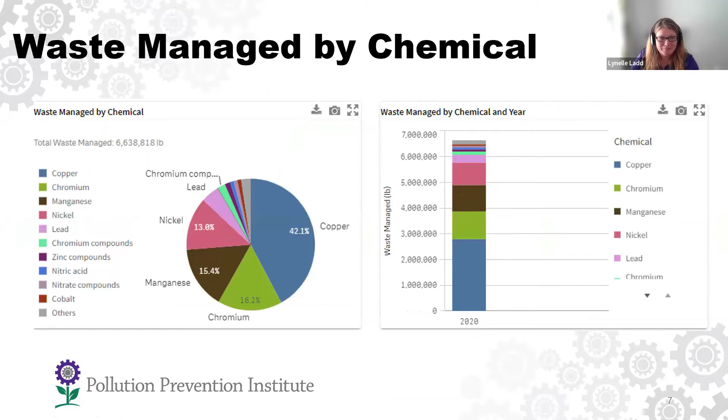I spent a lot of time. This was just in case I could not pull up and show you the internet. I just wanted to make sure I had those locked in.

Now let's talk about energy opportunities. And a lot of people say, well, this is low hanging fruit. Just about everyone knows about opportunities to reduce their energy usage, or change their process to reduce energy use. But one of the big ones that we help companies identify, and it's really pretty simple, is compressed air leaks.

And so I just wanted to start out with that topic and give you an idea of what it costs to operate your compressed air unit every year. So this is from FS Elliott, and they have a how to calculate your compressed air energy costs. And they gave this example, and it's really, I think, an excellent example to use.

So when your unit is fully loaded, if you had a 200 horsepower compressor rated at 215, and this would be brake power, I believe, that operates for 8,000 hours annually. So this number I want you to think about a little bit. A lot of people say, well, we only run one shift. Are you shutting off the compressor? That's something to think about.

If you're not shutting off the compressor every day at the end of the shift, there's a possibility that it is actually running this many hours. And then what we're going to talk about next, this becomes maybe a really huge draw on your electric bill. So let's think about this for a minute. There's a nameplate service factor that you probably should be able to find on your compressor. And then just assuming that it's loaded 85% of the time with a 95% motor efficiency, and the rest of the time it's not fully loaded.

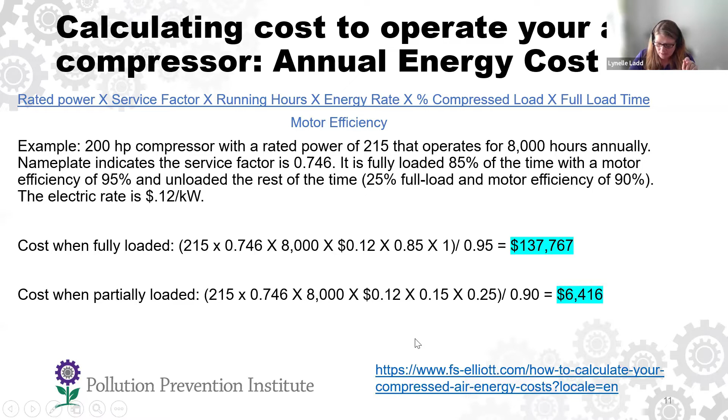So why is it important to understand this? Well, with compressed air, you're going to have energy loss. Your compressed air units operate on demand, and sometimes they're undersized. So they're just running, and they can't keep up with demand. Or due to poor maintenance, there's holes; either you're not maintaining the compressor efficiently, or you're not maintaining your hoses, connectors, lines, or even the air tools. They could be leaking all the time while they're sitting there and the compressor's running.

You may not have air storage, which could help save some air and reduce the use of the compressor. And sometimes we see employees in the workplace misusing air. So it's important to train employees on the appropriate use of compressed air.

In this example is a bleed or a blowdown. This company did not have a dryer on their compressors, so moisture would build up in the line, and they would open these blowdown parts of the system every so often to let the water out, because if you have water in your lines with the air and it gets to your tools, your tools are not going to function correctly.

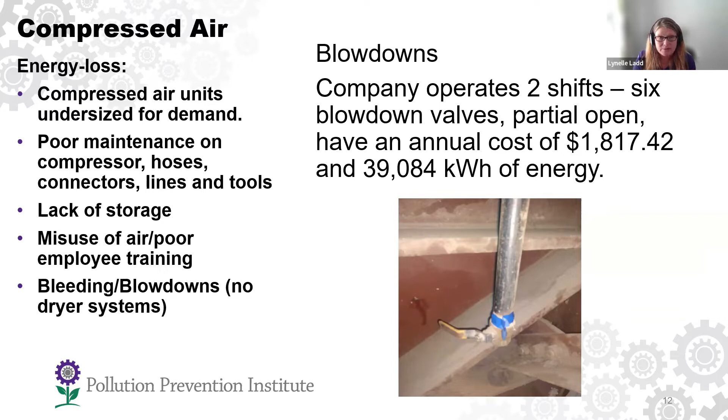But throughout the facility, we found other leaks that were occurring, and it all added up to some pretty big numbers. For instance, last year, our interns were at several industries that are considered metal fabricators. And this is not unusual. This is not a blight on the company. Whenever you're using compressed air and you have a rubber hose that's running against cut metal, you're going to get holes in your hose.

In just this one little snapshot, we found 33 leaks at one company, 30 at another, and the circuit rider looked at 6 different facilities and found leaks. This is one facility, this is another, and you can see that depending on how many leaks are identified and the size of the leaks, how much air is being lost, you can get some pretty substantial savings over a year's time if you would repair those leaks once they're identified.

And that's something that our interns can do. Our circuit rider intern can go into a smaller facility and do this type of work in one day and identify the leaks for you with a UE Systems ultrasonic leak detector, which is what we use. These are substantial findings, and it also helps save electricity for the company.

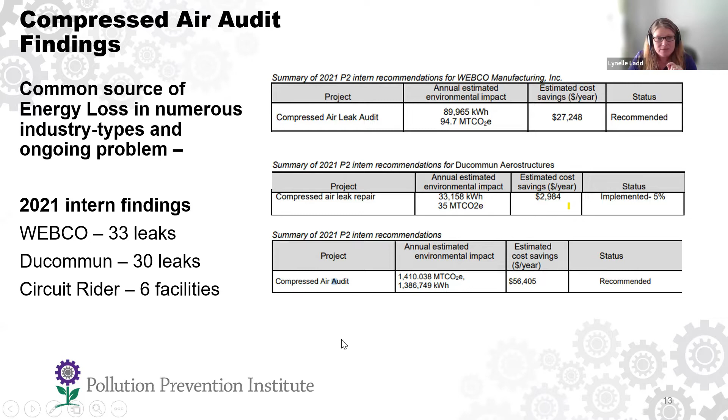Lighting is another area where we have a great opportunity to save. Again, it's low-hanging fruit. So, when we're talking about saving money and changing to LED, plug and play is the cheapest way to go. If you're going to have to change out your fixtures or ballasts and things like that, then we get into a little more capital cost, a little bit extension of the return on investment. But those are things that our students look at and can calculate for you.

Occupancy sensors, I'm just kidding here, not really, but they're not just for boardrooms and bathrooms anymore. We looked at a very large storage area where the lights are on 24/7 and people are not in there 24/7. So an occupancy sensor in that area was going to save 8,395 hours a year of those lights being on. And that was going to be 10,947 kilowatt hours of energy.

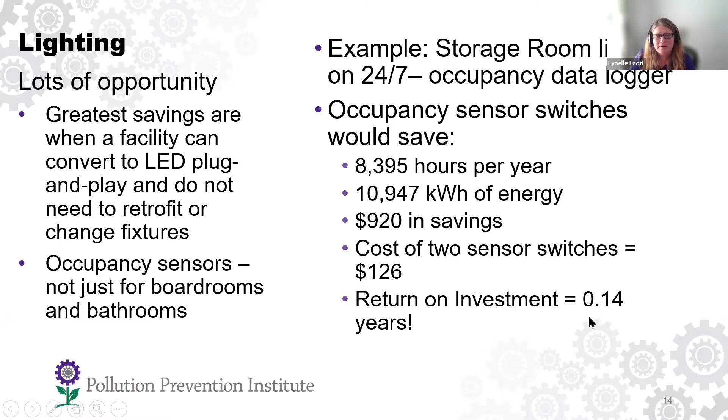It's small savings, but the return on investment, just to install these 2 sensors, was only going to cost $126. And so it's like 0.14 years return on investment, but at least the lights aren't on all the time if they don't need to be.

Fuel usage is another area that we like to help companies look into. The different fuel types you might be using in industry, right sizing your equipment, looking at your building envelope and your process areas. And when I say process areas, maybe you have an area that has to be climate controlled and another area that's not. And so that heat loss between those 2 areas can be very critical and may increase your fuel usage in the winter and your electric in the summer.

Shipping and receiving doors are notorious. They don't always close fully. People leave them open while they're moving materials in and out. And one of the things that's been brought to my attention recently is the winter storm that we had last year, where the temperatures were just frigid. Those surcharges are starting to show up on people's fuel bills.

So changing your fuel type, if you can get away from using a natural gas or a fuel oil and go with electric, that is going to make things more efficient at your facility. It's going to reduce your costs. And right sizing equipment is also important. We worked with CST Storage. They've been a great partner with us for many years with our intern program.

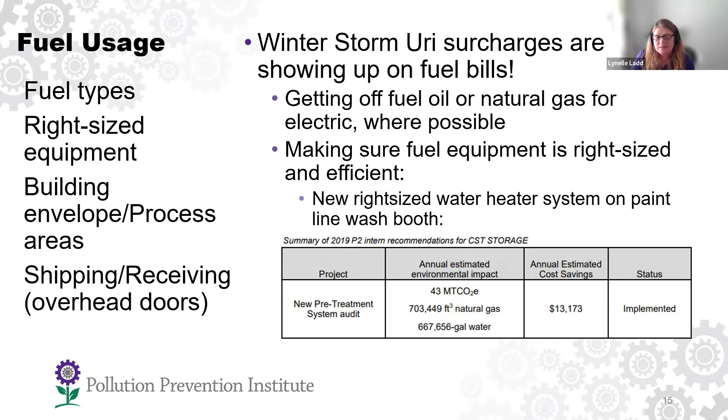So I just mentioned water savings. Let's look at that real quick. I wanted to make sure people were aware that there is some assistance and some guidance on EPA's website as well about water usage and metal finishing. So this is a guidance document that you can find. It's brand new. It was just issued this month of this year. I'll take you there real quick just so, if you want to look this up later, we have it linked on our webpage.

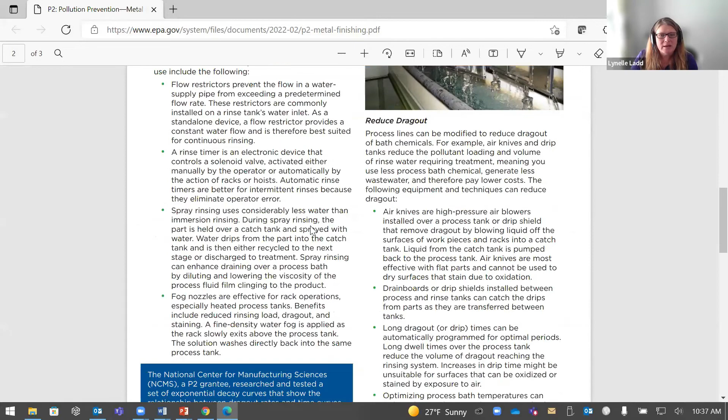But it is a really good overall guidance document about metal finishing shops and when you have to utilize these metal ion bearing solutions that contain chromium, zinc, nickel, and other metals. And Katie may touch on this, I'm not sure, but this is really great information and a document for you to review and read. I won't cover it here because I just don't have time to go through the whole entire document.

So wastewater is always something to focus on. And when you have a water treatment system, because the constituents of your wastewater contain chromium, let's say, you want to make sure you're operating that system optimally, how it was designed. Make sure you're doing preventative maintenance on that system, and also training your employees on how to operate

your water treatment system. So one of our interns last year was a circuit rider and looked at a company that had a water treatment system in, but it wasn't being operated properly. The employees had not been trained on how to operate this water treatment system, and it was from one of their plating tanks. They were looking at a recycle rate of 10%, and the effluent rate was 18 to 25 gallons per minute, depending on who was the operator that week or that day.

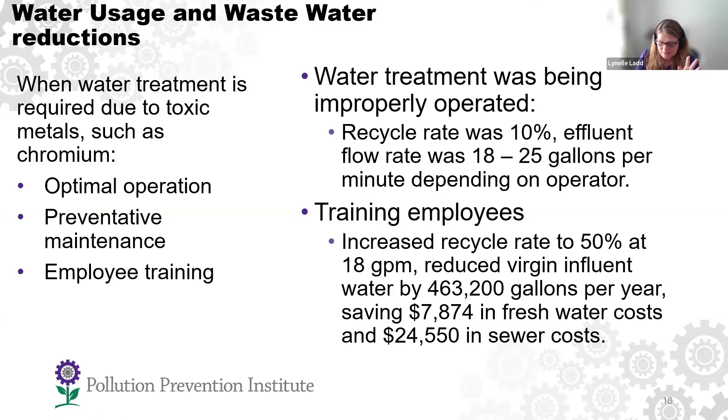I threw this in here because we saw a lot of industrial stormwater situations last summer with our interns. I wanted to make sure everyone's aware that with industrial stormwater permitting, it's called the pollution prevention plan that you have with an industrial stormwater permit, but it's not P2, it is regulatory. It's the minimum of things that you have to meet if you fall under this category. Most everyone in the major group 33 of the SIC code, which would be NAICS 331 and 332, needs to look at your stormwater discharge potential and evaluate if you need to obtain a permit and what you need to do there.

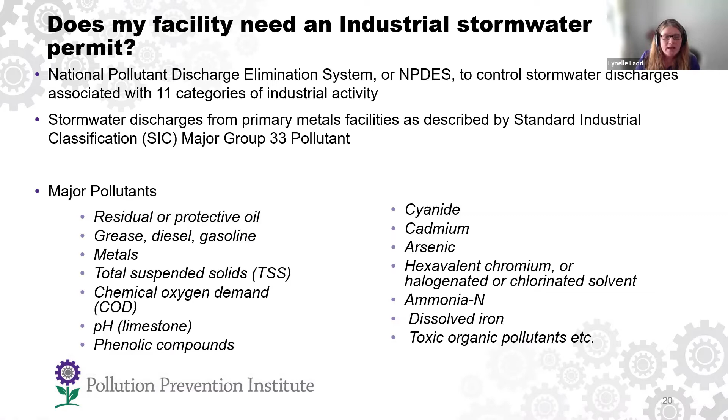So this is a list of the major pollutants that you would see in this group of NAICS in your operation, and why they would be of concern, and the type of activities where this could end up being a stormwater concern. So if you're storing material outside, if you have equipment like your trucks outside, and your fueling areas are outside and not contained. If you have waste storage, like hazardous waste storage outside, and it's not covered or contained. And if you have illicit discharges.

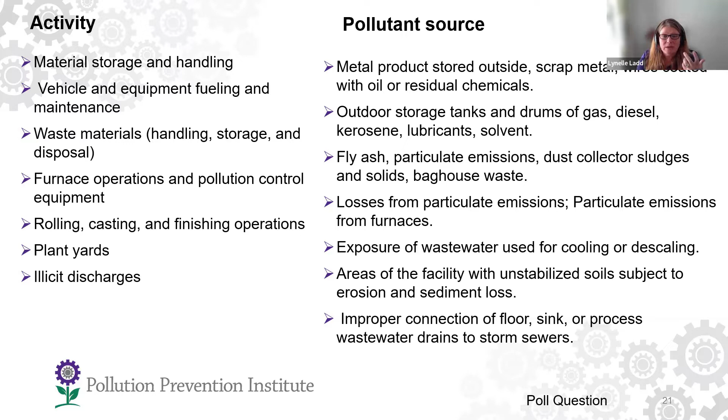Over here would be an example: when you're storing your products outside, it could be your scrap, it could be your final product. You might have drums that contain the fuel oils or the lubricants that you use. If you're storing your emissions, like from a bag house that's been captured, outside and it's not covered or contained, that could be a source of stormwater pollution. So I just wanted to bring this to everyone's attention, that this is a requirement that needs to be addressed in many situations.

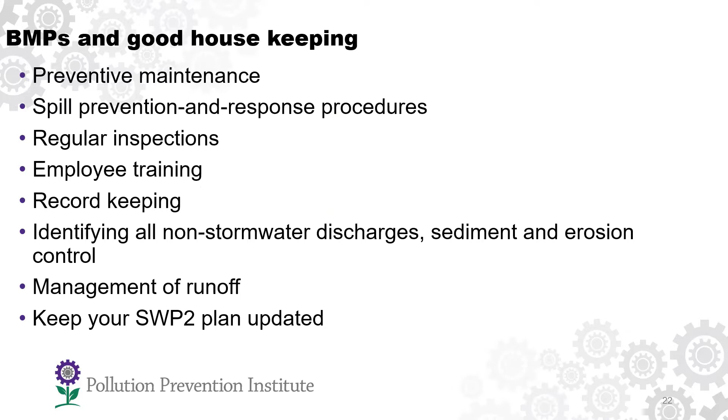Lynelle, you've got about 5 minutes left. Okay, I'm going to rush through this so you guys can see this. I won't stay on this very long because what I really want to get to is hazardous materials.

So when we're talking about hazardous materials, I wanted you to be aware that we have some really short, concise videos that deal with SDS and how to use your SDS to identify what's in the raw materials you're using at your facility. We have a video on chemical replacement strategies, chemical inventory management, and process change. I'm just going to show you where it is on our website real quick.

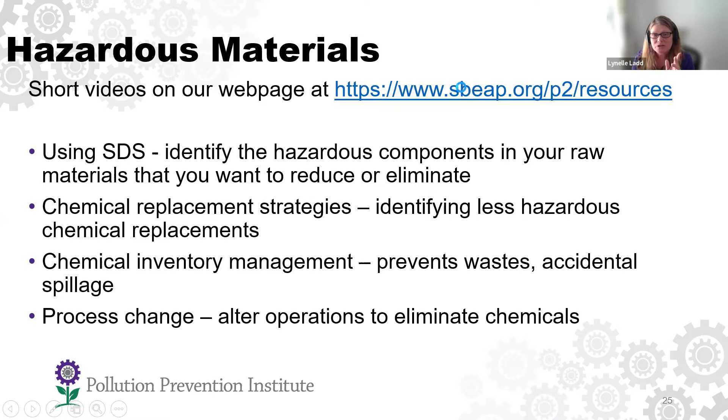We have a lot of P2 resources. This is the P2 tab that talks about our intern program and applications for businesses and students. We have technical assistance information, and all of our case studies from the intern work that's been done. Some intern case studies have presentation videos that you might be interested in watching, especially for an industry type you want to learn more about. We have a news page with some of the latest things going on, EPA information that might be of interest to you, and other resources.

And that's where our videos are. Hopefully you have access to YouTube, because if you click on these, it takes you to YouTube. Last year we had another best practices in the metal fabricating industries P2 workshop that we recorded, and you can watch here. We have some information about TCE, and then Region 7 has a pollution prevention roundtable, and all of our agendas and notes from our meetings are found here if you're interested in looking into that. But I wanted to make sure you were aware that we have a lot of resources, and we're trying to build those resources all the time.

So if you haven't heard, and I want to make sure that we cover this, EPA has added a new hazardous air pollutant to the hazardous air pollutant list. 1-bromopropane, or 1-BP, also known as n-propyl bromide, or nPB, has been added, and it went into effect February 4th. So it is a HAP, and right now there are no NESHAP or MACT standards that cover this. So they will be investigating whether or not to add this into already existing NESHAPs, or whether they will be creating a NESHAP to cover this. And this may be something that Katy will talk about here in a minute as well.

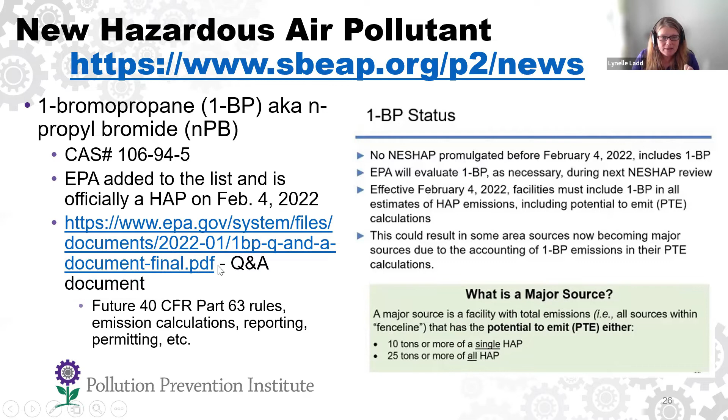Also, because it is a hazardous air pollutant, you now need to be tracking it and adding that into your total HAP emissions. So even though there are not any NESHAPs yet that would be applicable, you will be required to track it for your total HAPs. So whether you're an area source or a major source, you're going to have to put that into your total HAPs calculations for your air emissions. EPA has a question and answer document on their website. We can make this available to attendees at the end so that you have access to these links.

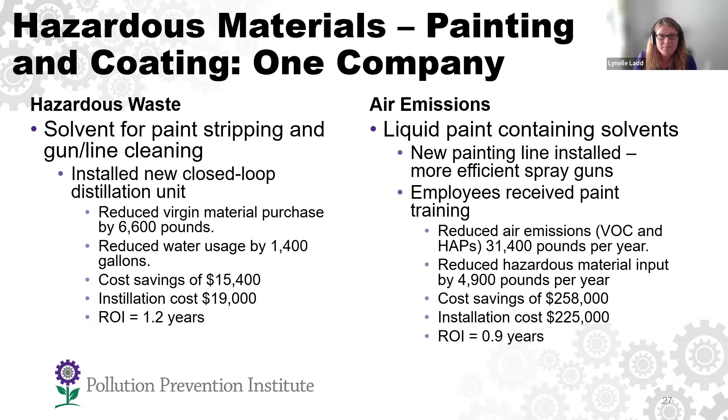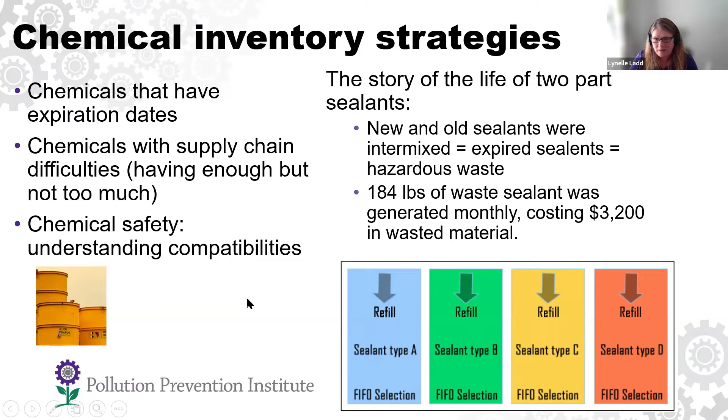Also, one of the things I want to talk about, and I know I'm kind of rushing through this and I'm so sorry, just give me a few more minutes.

Funding your P2 projects. We hear a lot from companies that they would love to do the projects that we have recommended, but maybe right now the funding is not there. We realize that your operations are first, and the funding for some of these projects may take a couple of years, 2, 3, 4 years, before you get the approval to actually implement the projects.

But EPA has issued some new information about P2 financing opportunities. There's a PDF that's a little tip sheet on how to finance your P2 projects. And they also have some links to commercial funding, government resources and programs, and green banks. These are banks that finance green industrial processes.

So I know I'm rushing through this, but you can always talk with us, and we're working to also investigate ways for our companies that we work with to finance the P2 projects that we've recommended, because when we identify these cost savings numbers and this reduction in pollution, and then we're unable to help you find funding for it, we feel really bad. So we want to try to link you up with financing opportunities if we can find them.

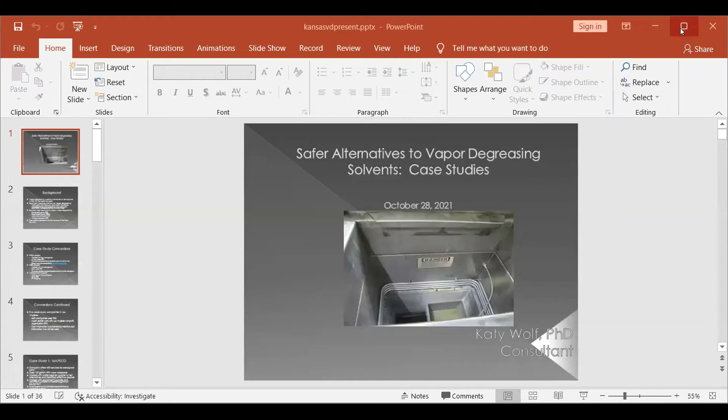Okay, let me see here. Sorry. Can people see my screen? Yes. Oh, good. I'll do full screen. Sorry. There you go. All right.

Okay, so hi everyone, I'm going to talk about case studies of safer alternatives to vapor degreasing solvents today. As many of you know, a whole range of operations rely on vapor degreasing, including metals processing, electronics, aerospace, and other types of precision operations. The solvents most commonly used in vapor degreasing include the 4 listed here: the 3 chlorinated solvents, trichloroethylene or TCE, perchloroethylene, or methylene chloride or MC.

And then, as Lynelle mentioned, N-propylbromide is another solvent, and it's a brominated solvent. I call it N-propylbromide, not 1-bromopropane. Nobody in industry calls it 1-bromopropane. So the conversion process and the safer alternatives that I'm going to discuss are really appropriate for applications using any of these solvents.

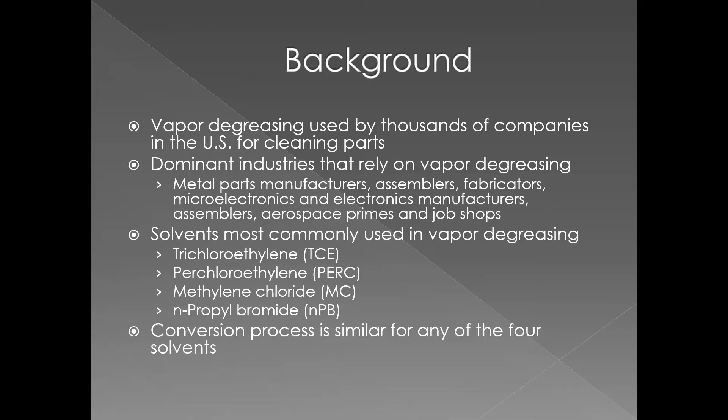So I worked with 9 different companies for the case studies I'm going to discuss, and 6 of these companies were included in 2 projects that I completed very recently. There were 4 companies in a project I worked on with the Pollution Prevention Resource Center, in the Seattle area. And that project was sponsored by EPA under the P2 program.

And I also worked with 2 companies in a project sponsored by the Hazard Evaluation System and Information Service, or HESIS, and they're part of the California Department of Public Health. And in all 6 cases, the companies were using N-propyl bromide, the solvent that Lynelle mentioned. And that isn't really very surprising, since a lot of regulatory agencies and pollution prevention providers have recommended that companies switch away from the 3 chlorinated solvents to N-propyl bromide in the last decade or so.

The chlorinateds have been more heavily regulated, so N-propyl bromide is now a HAP, so it's more regulated at this point. And it was always a problem. It is a carcinogen like the other 3 solvents. Now, half of the companies I worked with ended up converting to the alternatives. And I did complete work with the other half of the companies, but they didn't make the conversion in the time frame of the project.

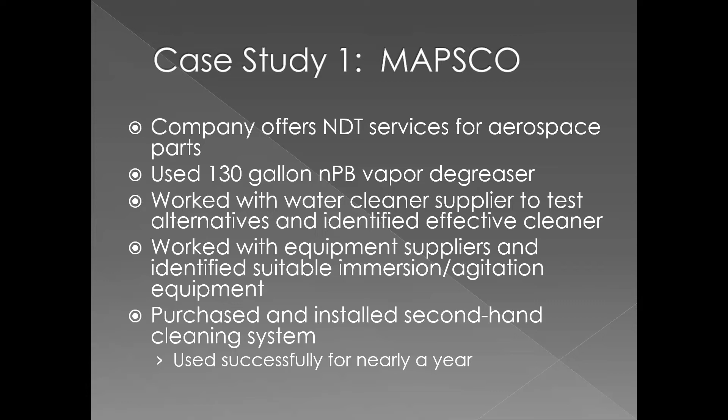So accordingly, I sent in an equipment manufacturer to quote the cost of a new system of this type, but the company felt that the cost was too high. So Mapsco then found a secondhand system, but another company purchased it before they could get it. So I got in gear and found another place that was offering a secondhand system of the type that was originally quoted. And Mapsco ended up buying it, and they've been using it probably for over a year now.

And I'm really not going to be able to discuss the assumptions I made for every element that went into this cost analysis for Mapsco or for the other case study companies I discussed today, because it would really take too long and it's also kind of boring. And I wanted to go over a bunch of different case studies instead.

So I do discuss these assumptions for 4 of the case studies in much more detail in the PPRC document I referenced earlier. I showed you the link on an earlier slide. And I also discussed the assumptions I made for the cost analysis for the last 2 case studies I'll present in a document on my old IRTA website. And I'll give you the address for that website on the last slide.

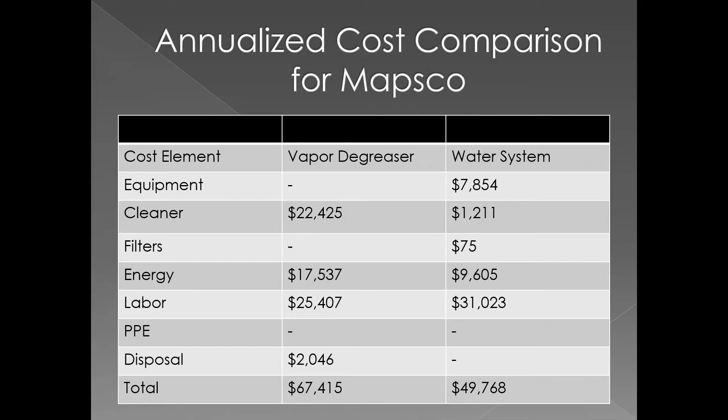I wanted, again, to include as many case studies as possible here because I wanted to give you a flavor for the range of different types of operations that can find safer alternatives. So back to the Mapsco cost slide, as you can see from the total cost figures, Mapsco reduced their total cost of cleaning by 26% by converting to the water cleaning system.

Now, the second company I'll discuss is a company called Exotic Metals Forming. They make ducting of all kinds for aerospace and industrial applications. The company used a large N-propyl bromide vapor degreaser for many years. And Exotic is subject to a lot of aerospace requirements, and they're also subject to the European Union REACH requirements. And I learned a lot about those requirements when I worked with Exotic. And in some cases, the REACH requirements are more stringent than things that we have here in the US. And in other cases, they're less stringent. So you have to be on top of it, kind of.

We did testing with a water cleaner supplier, and we identified a good alternative. And the company did end up converting to that cleaner for this operation and also most of the other water cleaning operations in the facility. And the company was able to use one of their existing immersion agitation systems for cleaning the parts that had gone through the vapor degreaser previously. So they didn't even have to purchase a new cleaning system, and they saved a lot of money by that.

We also worked on a related process that involved using an anti-spatter product in a laser cutting operation. People also use these anti-spatter products in welding operations, so they use the same types of materials. And a lot of times when I work with companies, there are related operations that arise that would affect the conversion to alternatives. And I generally end up including those operations in my work with the companies so they can make a better transition.

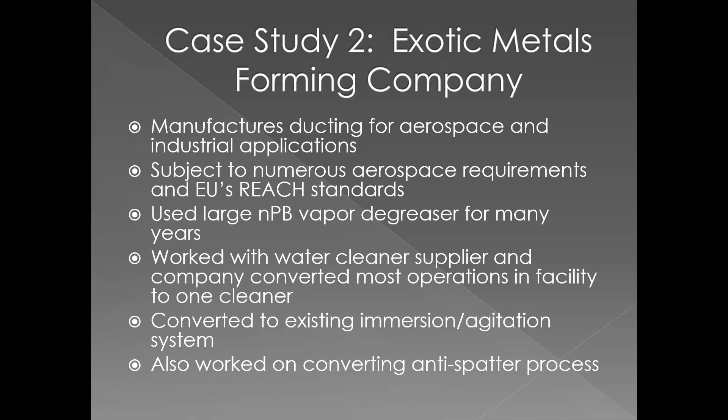And in this case, for example, the anti-spatter the company was using had N-propyl bromide in it. And if they had converted to a water cleaning process, the spent cleaner would be contaminated with N-propyl bromide when you clean the parts that had it on, and there would be a higher disposal cost. So we had to get rid of the N-propyl bromide in the anti-spatter. And just to mention, in general, the commercial anti-spatters on the market contain methylene chloride and not N-propyl bromide.

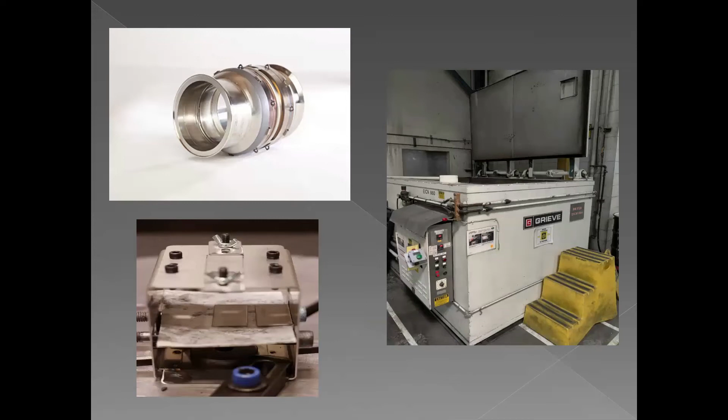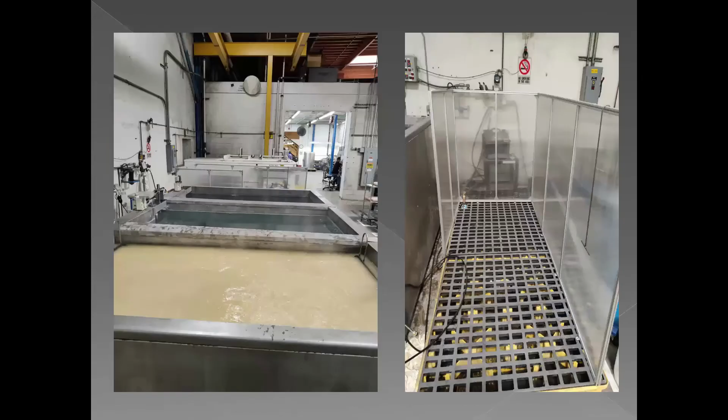So on the top left of this slide, the picture shows one of the company's parts, which, as you see, can be really complex. And the picture on the right shows the vapor degreaser that Exotic used. The bottom picture shows a fixture a company engineer designed for testing the anti-spatter alternatives. On this slide, the picture here on the left shows the immersion agitation system cleaner bath and the 2 rinse baths that follow it. And the picture on the right shows a temporary pressure washer rinsing station the company needs to use after the 2 other rinses. They need to do a lot of rinsing. Exotic did plan to purchase a better pressure washer station, and they've probably done so already.

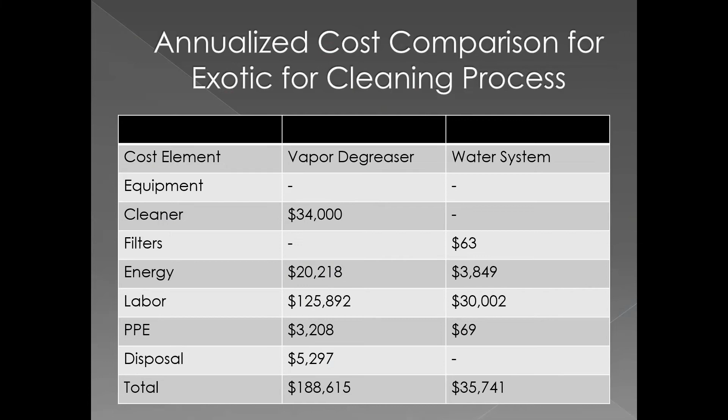This slide shows the annualized cost comparison for the cleaning operation. Again, I won't describe the derivation of all the numbers, but the total figures show that the company reduced their cost of cleaning by 81% through the conversion, and that's a lot.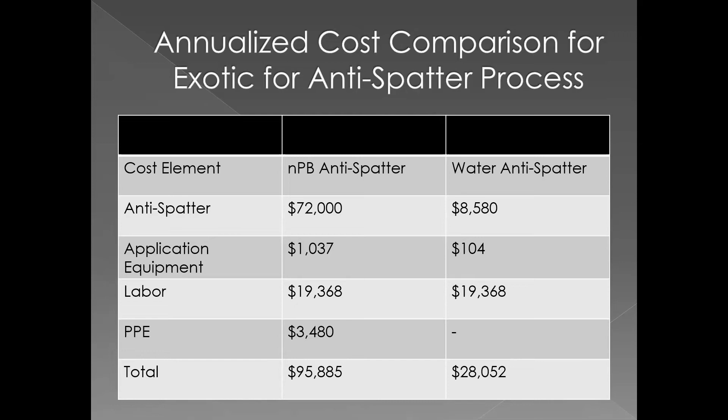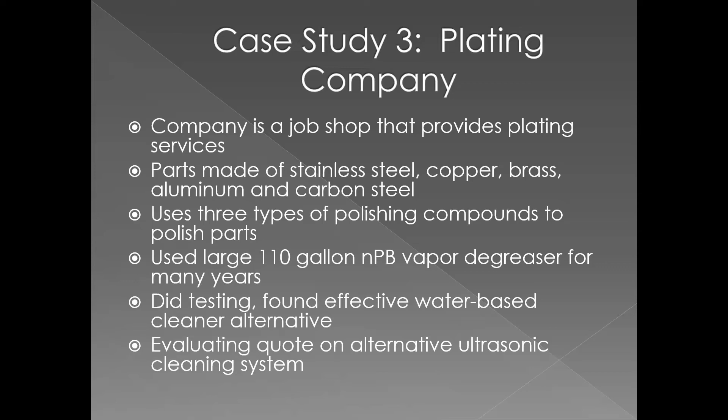We did testing with a water cleaner supplier, and we found a suitable cleaner. And I then arranged for 2 equipment suppliers to provide quotes to the company, and the company has those quotes, but they didn't make a conversion within the time frame of the project.

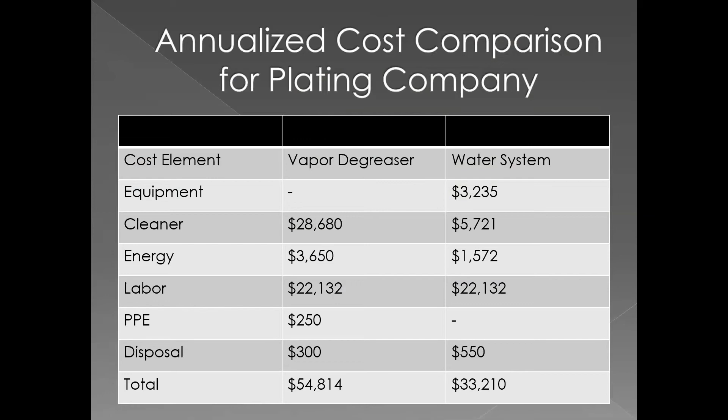Now, the last company I worked with in the PPRC project was a tube manufacturer who made small diameter tubes that are used to transfer liquids and gases from one place to another in aircraft. And the company had a very, very old vapor degreaser when I started working with them. I don't think I've seen a vapor degreaser like that for probably 40 years, which tells you how old I am. And they converted to a new, tighter vapor degreaser shortly after that. And they did hire an industrial hygienist, and I think she told them that the exposure was too high and that they should do something about it.

Again, in this case, we found an appropriate water cleaner. And I was aware of another company in Southern California. They had similar operations, and they had converted to an ultrasonic immersion system some years ago. But the equipment supplier that I was working with and I thought we could use a different operation that would be less costly. So we did testing in a spray cabinet with a specially designed fixture to flush the insides of the tubes, and it worked successfully. We sent the parts back to the company, they cut them apart, and they deemed that the tubes were clean on the inside.

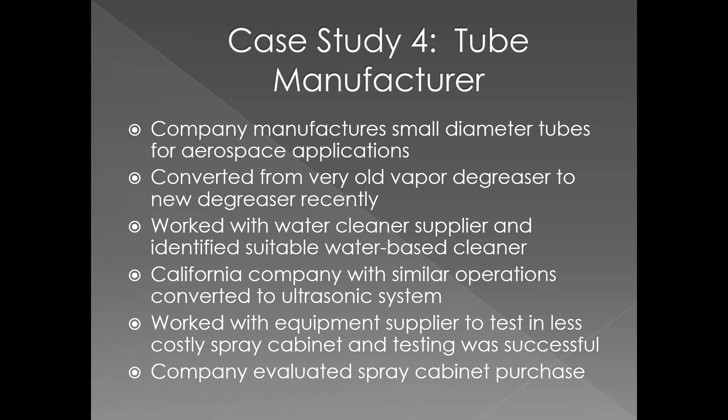The equipment supplier quoted both an ultrasonic system and a spray cabinet, and as expected, the cost of the spray cabinet was the lower of the 2 quotes. Again, the company is evaluating the quotes, but they didn't convert within the time frame of the project.

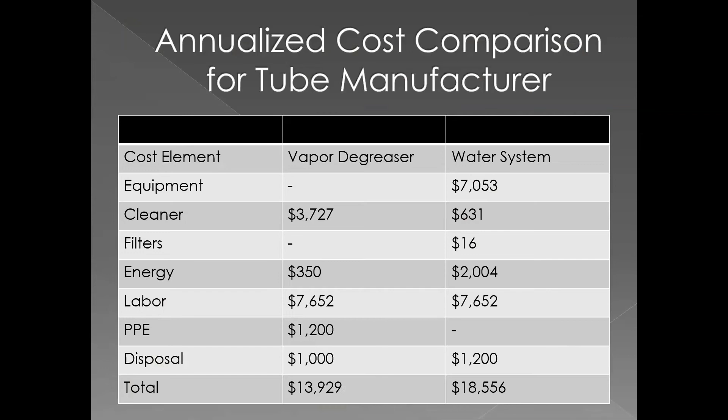Now, in the HESIS project, I worked with 2 companies in Northern California, and one was a microelectronics manufacturer. The microelectronics were used in medical devices, so the company was subject to FDA requirements. They used a thick film deposition process in their manufacturing, and they needed to remove particles and handling soils several times during the process. They had historically used an N-propylbromide vapor degreaser for cleaning the parts from the process.

And partway through the project, I learned that they had a water cleaning process for removing flux from printed circuit boards. And although the cleaner they were using for that wasn't necessarily an ideal cleaner for the thick film deposition parts, I really thought it would be worthwhile to try using it, because if that worked out, they wouldn't need to purchase additional equipment. So we did the testing, and the defluxing cleaner actually ended up working quite well.

So I then provided the company with information on the problems with N-propyl bromide, and they gave that information and also the quality control information from the cleaning tests we did to the FDA, and the FDA ended up approving the use of the defluxing cleaner for that operation. So the company converted, and they didn't need to purchase a new system or a different cleaner. So they reduced their costs substantially through that conversion.

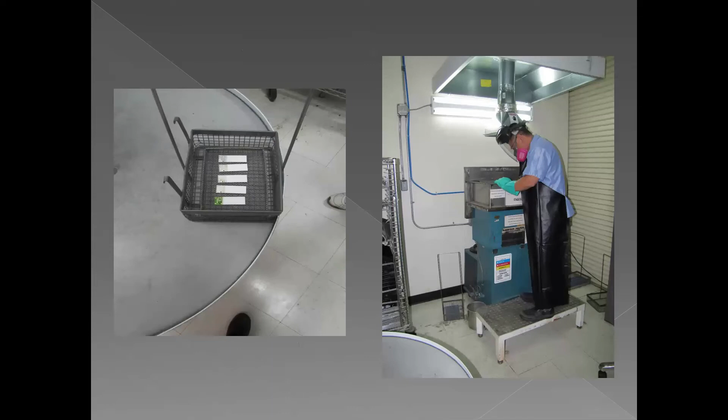Now, the picture on the left of this slide shows some of the microelectronics the company makes, the devices. And the picture on the right shows the vapor degreaser that the company had.

Now, the next company I'll discuss is a job shop that makes optical components. The company uses materials like pitch and wax to polish the components. And contaminants like that are extremely difficult to remove. The company had been using an N-propyl bromide degreaser for several years. And I had worked with companies in the past in Southern California, and I had helped them to convert to a soy-based cleaner, which is very good at removing those types of contaminants.

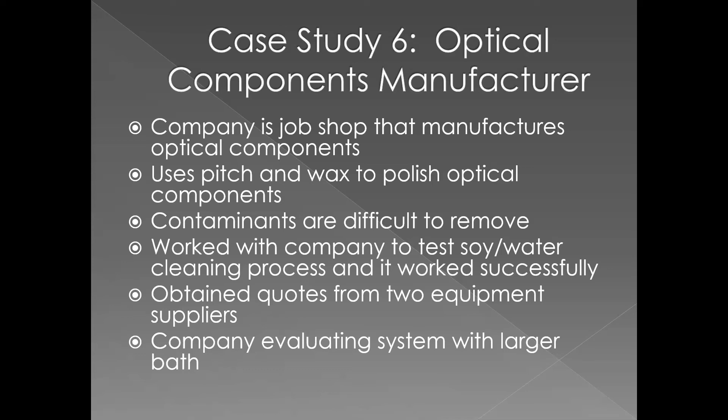So I asked an ultrasonic system manufacturer to test the company's parts, and the soy cleaner, followed by a water cleaner, did clean the parts effectively. I arranged for 2 equipment suppliers to provide quotes, and the company is evaluating those quotes. Again, they didn't make the conversion. I did the cost comparison based on the company purchasing the system, which had a larger bath, because I reasoned that it wouldn't be changed out as often, and that would be an advantage.

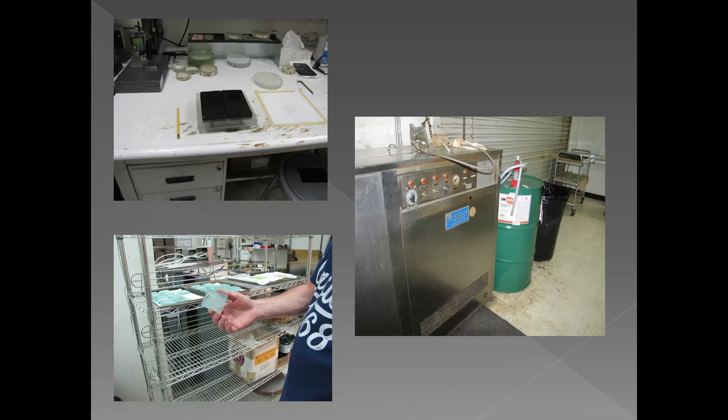Now, the picture on the top left of this slide shows the pitch that they need to clean. It's an asphalt-like material, and it's black, and you can see that it might be difficult to remove. The picture on the right shows the N-propyl bromide vapor degreaser, and the bottom picture shows one of the components the company makes. The cost comparison in this case shows the company would be able to reduce their cost of cleaning by a couple thousand a year if they were to convert to the soy-based cleaning alternative.

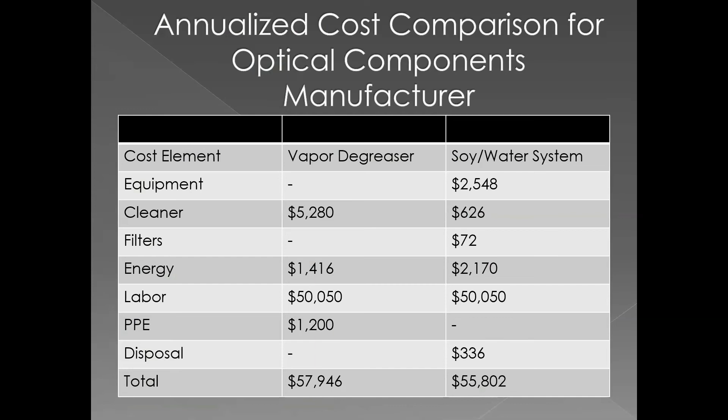Now, in this next case study, I'm working with North Carolina State University Veterinary School Anatomy Lab. This is a really bizarre application. And they have a whole process for preparing animal bones that they articulate into skeletons for teaching purposes. And in the first step, they have to physically remove the gross flesh and skin and things like that. And that's very time consuming and messy, as you might imagine.

The second step is a maceration step, which just means more flesh removal, just not surface flesh removal. And for that step, they boil the bones in water, and it might take a really long time, maybe 2 or 3 weeks of doing it over and over. During the third step, they degrease the bones in a vapor degreaser using trichloroethylene. The degreasing has to also be done several times. And if you don't do this degreasing step, fats can leach out of the bones at a later time because they're still in the marrow, and that would be awkward if you're teaching and have this skeleton there.

So I knew right away we'd need to use an ultrasonic system for the conversion to water-based cleaner. Again, ultrasonic cleaning's aggressive, but at the same time, we needed to be careful not to damage the bones. And I'd never worked with bones before, so I wasn't sure. But we chose a water-based cleaner for testing, and we got the people at North Carolina State an ultrasonic system so they could do some initial testing on site. And it seemed to work very well, and it didn't damage the bones. And it looks like it's going to be faster than using trichloroethylene.

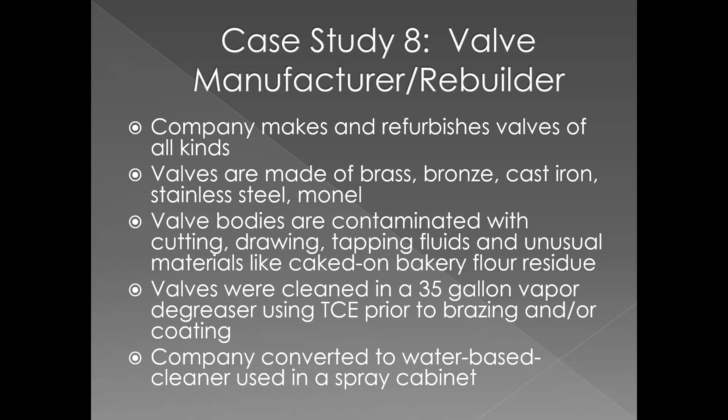And for the refurbishing, the degreaser was used to remove all kinds of contaminants the valves had on them from years of use in the field, and even things like bakery flour, as you see I've listed. The degreaser was also used to remove other types of processing fluids in the case of the new valves in preparation for brazing or coating. And we tested alternative water-based cleaners and found one that worked well. And the company ended up purchasing a spray cabinet to use the water cleaner.

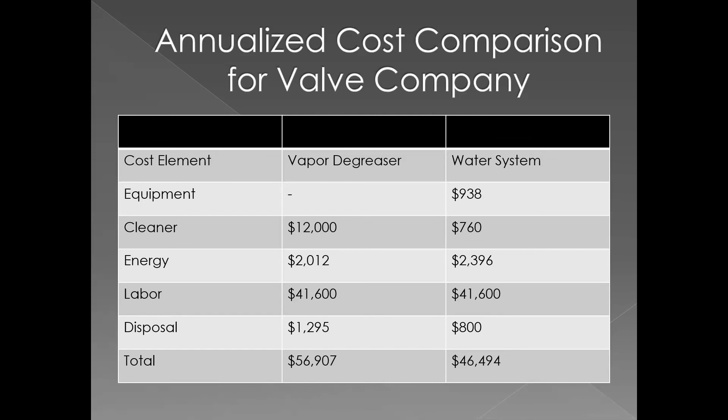Now this slide shows the annualized cost comparison for the valve company. As I mentioned earlier, the cost information is old, so it's probably not still viable. However, the relative cost information I think might still stand. So the total values in the table show that the company reduced their cost by 18% through conversion to the water cleaner.

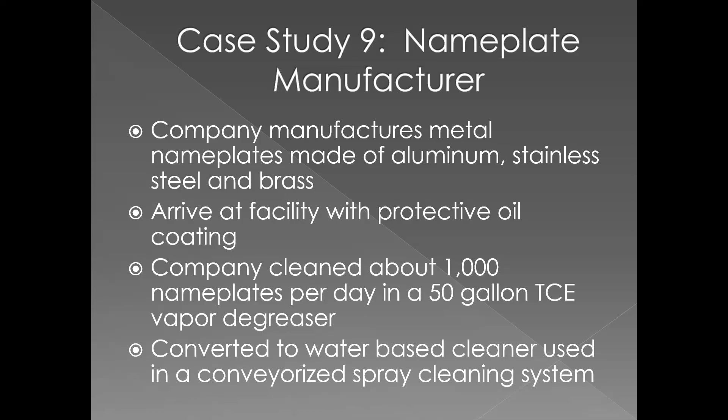And you load the parts on the conveyor belt at the front of the machine. Then they go through a chamber where they're sprayed with high pressure cleaner. And they then go through a high pressure water spray rinse, and it's a recirculating rinse. And then they go through a dryer. And the nameplates come out the other end clean and dry.

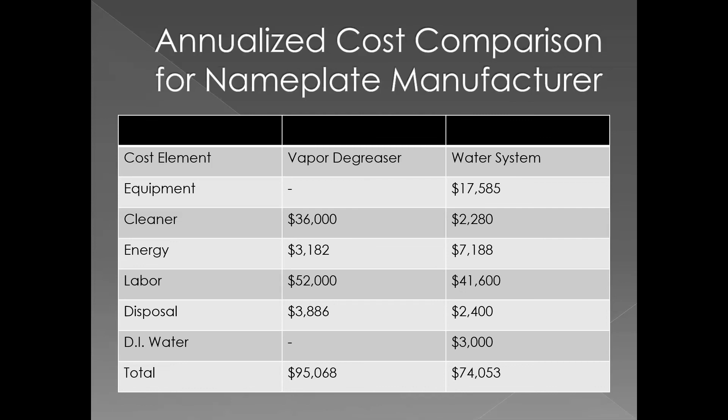This slide shows the cost comparison for the nameplate company. And although the conveyorized system was expensive, I think it was about 150 grand with the recirculating rinse, the company did end up reducing their labor costs through the automation. They were able to reduce their total cost by 22% by converting to the water-based cleaner.

And I can talk about what all those alternatives are and what their problems are if anybody's interested. And if the companies always use vapor degreasing, they're often skeptical that water cleaners will even work. And so what I find is the testing with water cleaner suppliers and water equipment suppliers can dispel the fears. And those suppliers will do all the testing for the companies for free because they want the business.

And suppliers will often also do all the testing to get suitable cleaners aerospace approved. But there are also many water cleaners that already do have aerospace approval. Now, another issue is cost, and I try to make the alternative cleaning systems as low cost as possible. No one wants to pay more than they have to for cleaning, obviously.

One of the companies I talked about bought a secondhand system that I helped them find. And as I mentioned, we tested a spray cabinet, which was cheaper than the ultrasonic system for the tube manufacturer. And in a couple of cases, the companies didn't even need to buy new equipment.